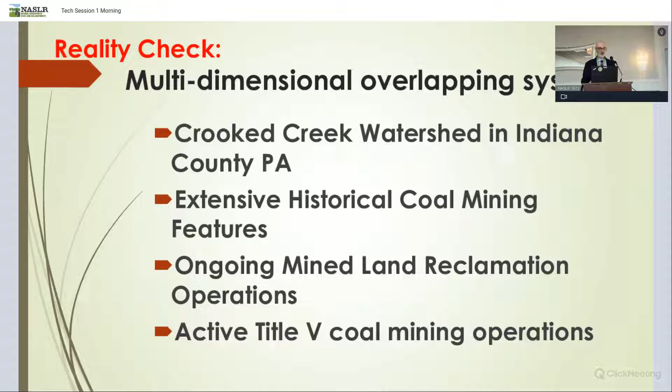And the Crooked Creek watershed in Indiana County, PA is no different at all. It's got extensive historical coal mining features. There's ongoing reclamation activities that have been going on for quite some time we'll talk about. And there's still Title V active coal mine extraction going on in the watershed to date. So it's not black and white, folks.

And when I say the word systems, overlapping systems, I'm a trained scientist. I think like this. That's just my default setting. When I use the word systems, I want to get us all on the same page. Systems in my lingo can be either closed or open. Closed systems are something that we've all been through in class and laboratory, where we control the conditions. We control the physical boundaries of our experiments. We control the temperature. We control the energy and the matter going into the system. And then we make measurements based on what we observe, right?

And we identify properties and thermodynamics and things that just happen, and we use those, but then we apply them to the real world, and they're open systems, guys, right? Where energy and matter can be exchanged with the physical surroundings through time. So physical input almost constantly changes, right? And then the physical boundaries of these systems change. Sometimes we add a property. Sometimes we add some airspace because something's been piled up. Sometimes we can subtract the volume that used to occupy an airspace and all the constituents thereof.

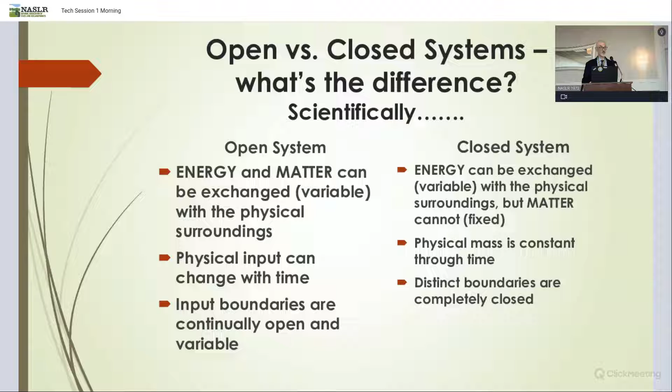So we're dealing with open systems here, and there's programmatic challenges of dealing with open systems, and it's a question of provenance and influence. And when I say that, I mean it matters where something happened and when it happened. And it matters to us as a group of professionals here this morning because it has everything to do with the funding eligibility and the funding streams through which we gain the means to deal with these problems. It matters when we identify the responsible entities, whether that's a financial liability or the professional entities that are going to take the fund stream and turn it into meaningful projects.

It also helps us define our scope of work, and we just have to consider the influence of what we do, because groundwater and surface water just doesn't hold still, right? It falls out of the sky, it piles up, gathers itself in, does what gravity does, and it moves through. So when it affects the periphery, it has everything to do with how we consider challenges, and it's really important that we tackle these problems with a cooperative nature. It's really crux to these things. So the mindset that our group at the BAMR has taken with a lot of the NGOs and partnering agencies is to design for versatility and partner with talent.

A phrase that I'll borrow from when I grew up is cast a wide net and get good help. And I think that that's largely represented in the room today and who's viewing this online. To characterize the open system dynamics that I've been talking about, just characterize it. A snapshot in time is one thing, but to characterize how the systems work and what's influencing through time and make those kind of interpretations and communicate clearly is really important.

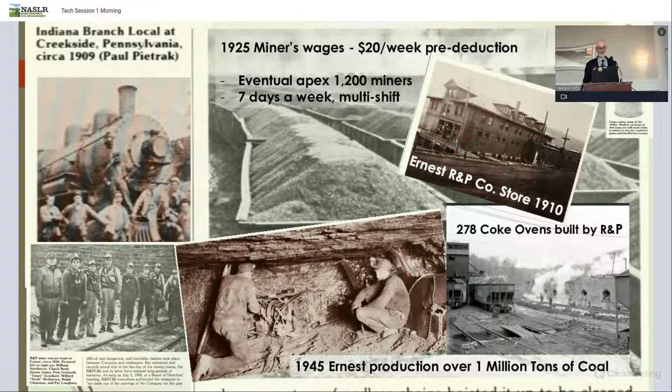I'm going to introduce you guys to some of the main suspects if we were building a dossier or a file about this watershed. The primary contaminant source area from the surface that we'd like to show you guys today is this Ernest refuse pile. It's that area I was pointing at. It was comprised of 94 acres of accumulated coal refuse from those mine complexes. Chemically speaking, it was high BTU and low sulfur, so it's valuable stuff. But the estimated volume of that pile was, give or take, 10 million cubic yards, okay? So think 94 acres at an average depth of about 100 feet. It was an unlined valley fill of stuff those guys didn't want to use because the stuff they brought out was not much better.

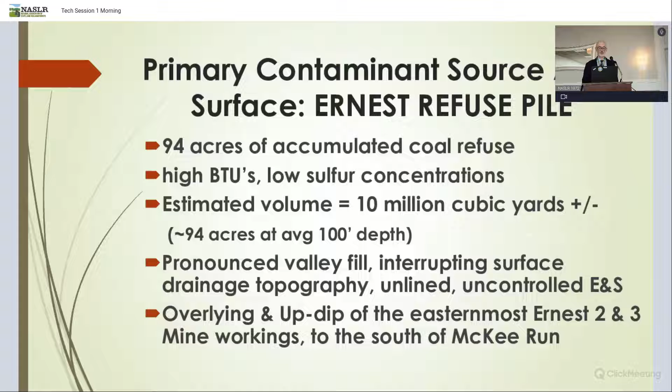But it interrupted the drainage topography. The E&S, the stormwater was an uncontrolled setting. It was just everything we don't want it to be from the reclamation perspective. It was overlying and up dip of the easternmost deep mine workings, which we know as the Ernest 2 and 3 mine workings, to the south of the receiving stream known as McKee Run.

Another primary contaminant source area in this watershed from the underground perspective, as I had mentioned, was the Ernest 2 and 3 mine pool. The mine pool area is comprised of over 2,400 acres of mine workings. Now, the entire complex that's connected to everything underground in this area is 21 square miles. So the hydrogeologically connected portion of that for the Crooked Creek watershed is only about 18% of that, comprised of over 2,400 acres. The drainage area for this particular area, though, is over 5,400 acres.

The mine pool volume is just this massive number. It's 1.5 billion gallons of water, or storage capacity in those mine workings. The total mine pool area above the discharge elevations that you saw on the map comprised 508 acres, okay, but 314 million gallons of storage capacity in the elevations above the discharges. What that means is we have hydrostatic pressure pushing that much water out at those discharge elevations. So there's 314 million gallons of storage capacity that's fluxing through.

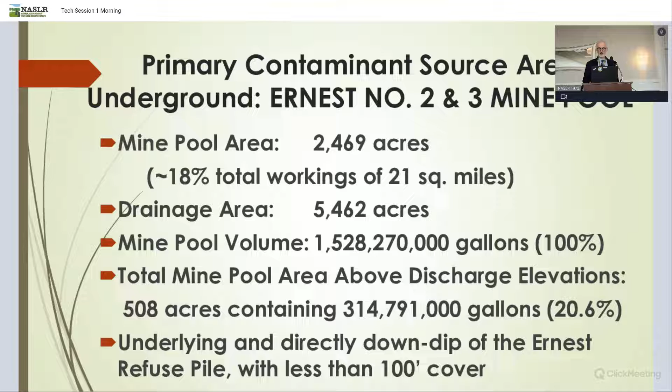Now to those point source discharges. The Ernest Mine Portal was the easternmost of those stars on the map, and it was an Upper Freeport Mine Complex drift entry, and it's currently free flowing. Okay, the estimated surface elevation is about 1050. It's up dip and at higher elevation than the other discharge I'll talk about in a moment. That's about 1.4 miles from that other discharge. Okay, but it flows at about 630 gallons a minute presently. It used to be more than that.

But we're talking about 330 plus million gallons per year, and it loads pollutants in the Crooked Creek watershed to the tune of 77,500 pounds per year of our normal mining constituents there, being the key run. Now, those last 2 points I'll kind of leave off. There's been a chemical shift in that loading rate, and there's been a flow shift at that point too, and I'll get into those details.

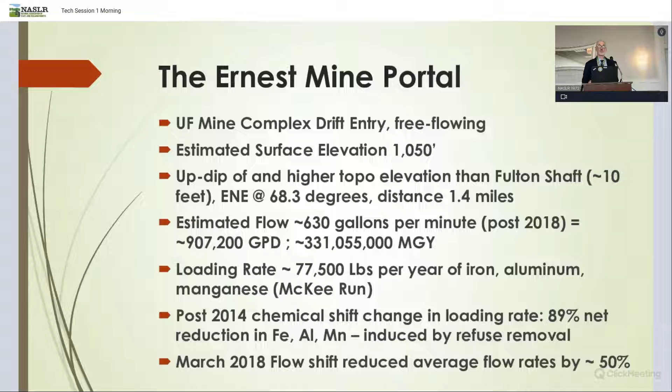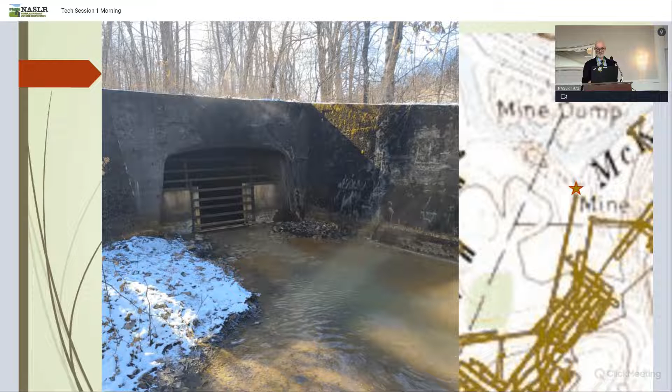It's kind of a teaser there, but there's a picture of the Ernest Mine Portal for you guys this morning. It's plain as day. What is that? It's a mine entry, and there's water pouring right out. There's a peek inside a little bit. You can really see far back into that.

Okay. The other point source discharge to the west is known as the Fulton Shaft. Same mining complex. It's a shaft structure, largely collapsed. It doesn't look like a shaft. I'll show you a picture in a minute. It's about 10 feet topographically lower than that other discharge point at the Ernest Portal. Okay. It's also down dip. Its estimated flow right now is about 1,150 gallons a minute, okay, or maybe 604 million gallons a year.

It loads pollutants into the stream as well to Fulton Run and Crooked Creek, okay, maybe 47,000 pounds per year. And it's also experienced some shifts in loading rate and flow, and I will get into that a little bit later. So if you want a teaser there, look real quick before too late.

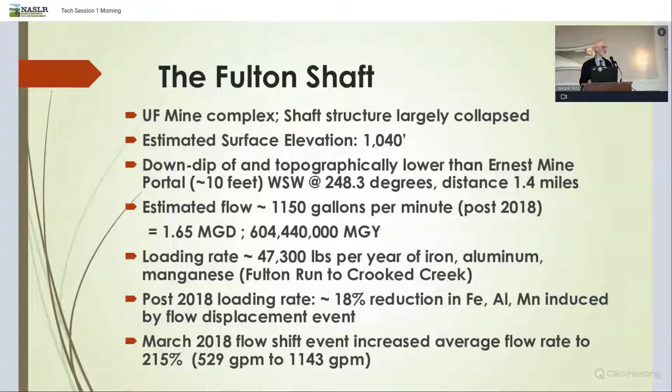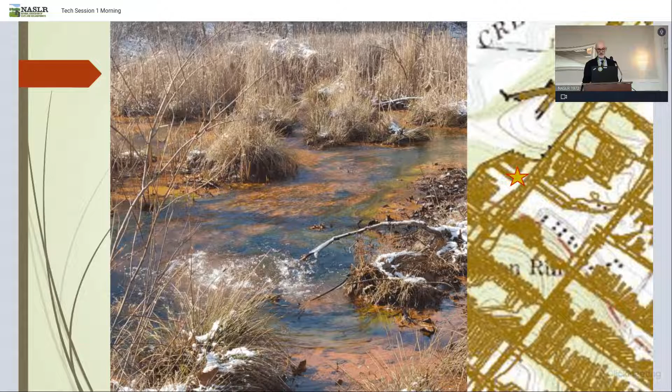Okay, here's a picture of the Fulton Shaft. It's an upwelling in a swamp. Okay, you drive up to it and it just looks like a wetland. But if you see the bottom of the picture there, that water is really boiling. It's really difficult to measure the flow. We've made some interpretations regarding that. It was measured one time when the flow was less and there were easier apparatus installation opportunities there. But you see a lot of iron deposition, things like that. Fulton Shaft chemistry, I threw this in here just real quick.

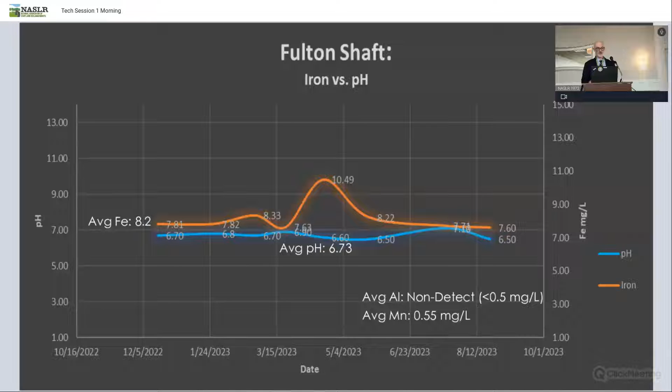It's not terrible looking. Okay, its average pH in the past year has been 6.7. The average iron concentration is only 8.2, so it's not that bad. That'll come into play in a little bit here. There's another picture of everything.

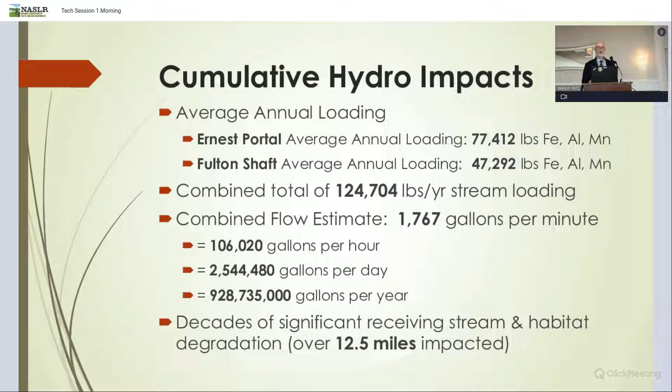The combined flow estimate from these things is about 1,800 gallons a minute, just shy of 1,800 gallons a minute, which translates to 928 million plus gallons per year coming out of that directly into the surface water. And it degrades significant receiving stream habitat for about 12.5 miles, and it has done so for some time.

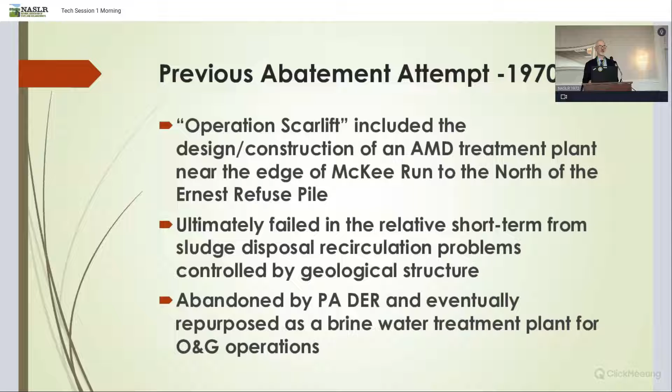Okay, so it was a great learning opportunity for us to understand a lot more about sludge recirculation and where to get rid of this stuff and just move forward positively from that. Okay, it's there today. You can drive right past it. It's currently a brine water treatment for some oil and gas operations.

Okay, with that, I'm going to hand things over to Todd Coleman from My Tech Engineers. He's been working with that coal refuse removal project that Robindale Energy Services has executed over a number of years, and he's going to tell you a little bit about it.

Yeah, thank you, Mike. With the construction of the multiple cogeneration plants around the Ebensburg area, Cambria Cogen, Ebensburg Power, the Colver plant that some of you toured with us yesterday, they were all built in the year of about 1988 to 1993. And with the construction of those plants began the scramble to acquire and permit long-term fuel supplies to feed those plants.

Air Products Corporation from Allentown built the Cambria Cogen plant at the Mine 33 site, which again, we toured there yesterday also. And in 1993, they entered into an agreement to buy the Lucerne and Ernest refuse piles from R&P. The Lucerne pile was located about 6 miles south of Indiana at the town of Homer City, and the Ernest pile was about 5 miles north of Indiana at the town of Ernest that Mike has showed you some of the history of.

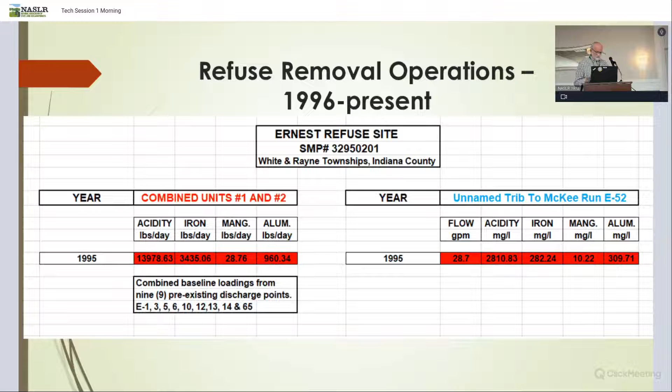The economic and business model from the operator was and had to be that when a truck left with fuel for the plant, it's bringing back a load of ash. Basically, the return volume is about 90% with what they add in limestone, water for hydration. There was over 10 million tons of refuse taken from the site. We were permitted to bring back a little over 9 million yards of alkaline ash.

So that being said, you couldn't start at the bottom end of the pile because the refuse is 130 feet deep. There's no way you could get enough refuse out of the way in the beginning to create enough area to immediately start placing ash. So consequently, you had to go to the south end of the pile where it was 40 feet thick, start trucking out, so you could immediately create airspace to begin ash placement. So that then brings the problem as you start to advance south to north. You now have the stream chasing you from behind.

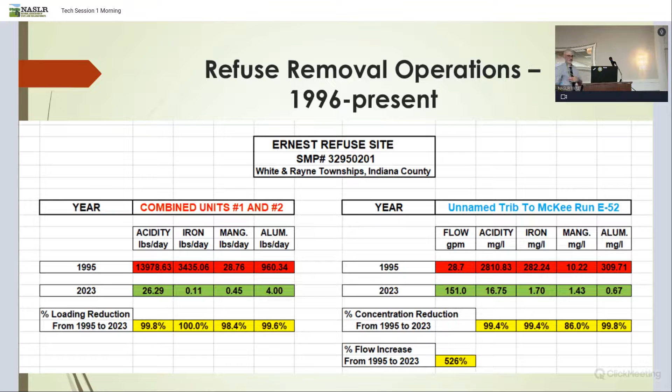Okay, folks, time is an issue. I know slow and steady wins the race, and the race has been won, but I have about 2 minutes maybe to close this one up. We've got a whole agenda in front of us. So Brandon and I are going to take you through what I call the micro machines narration now. Do you remember those old commercials with the micro machine guy that had to talk fast?

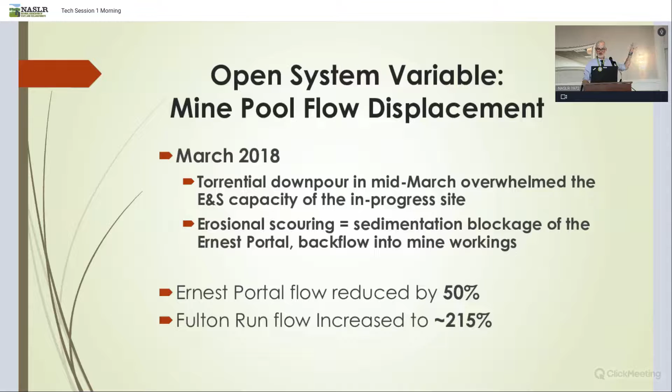That was really the game changer. That refuse removal was the game changer. What it did in our open system was it displaced the flow from one of those discharge locations to another. Really, the Ernest portal flow was reduced by 50%. That was displaced down to the Fulton Run, okay? Just note that the flow is displaced. See, there's a graph. This was the old flow. That's the new flow, 50% reduction, okay?

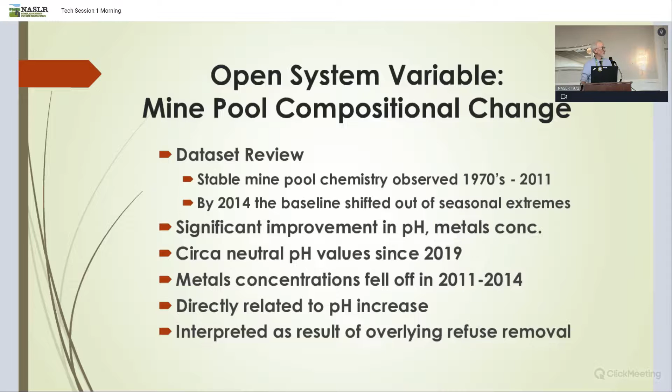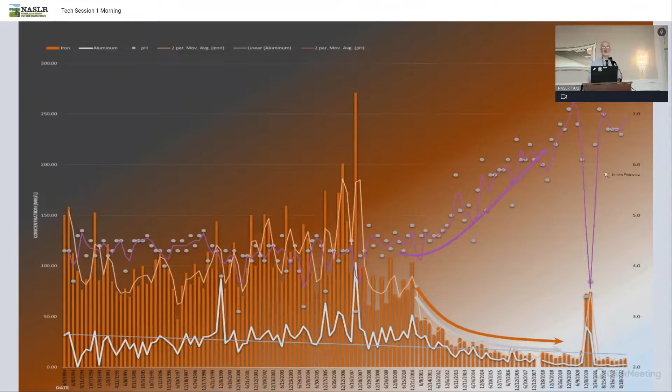The other open system variable that changed was the mine pool composition detected at the Ernest portal, okay? There's a lot of verbiage here. What you guys need to know is that the pH increased from the low 4s to about 7, okay? The metals decreased from a lot to not very much. This is the entire graph. That curve right there is the pH over time. These are the metals loading coming out of the Ernest portal. See how the metals just drop and pH goes up? That's interpreted to be the result of that refuse removal, okay?

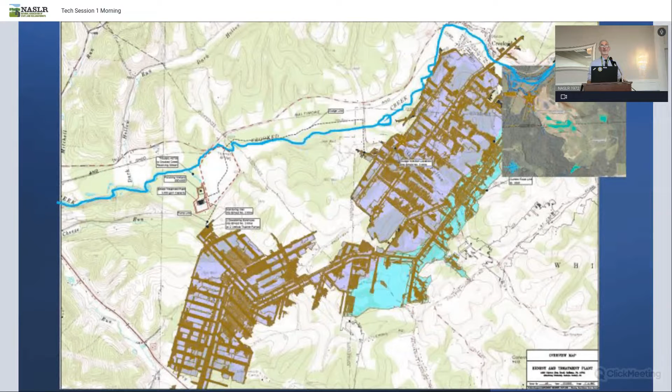So if I can speak for Brandon real quickly, the figure here shows all of the features that you see here and also the plans for a Title IV treatment plant, okay, that's going to attack the Ernest mine pool and eliminate these discharges. And because of that chemical shift, there's a cost savings multiplier of 2.9. That water is going to be almost 3 times cheaper to treat if and when this plant, which has currently been applied for and is pending through the bill funding, will be installed. There's a conceptual view of the plant. Happy to talk to you about that situation. And I'll turn it over.

You keep going. Keep going. Okay. I want to, Brandon, stand over here.

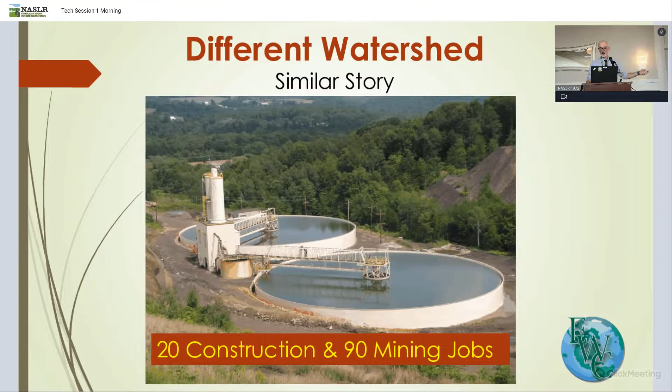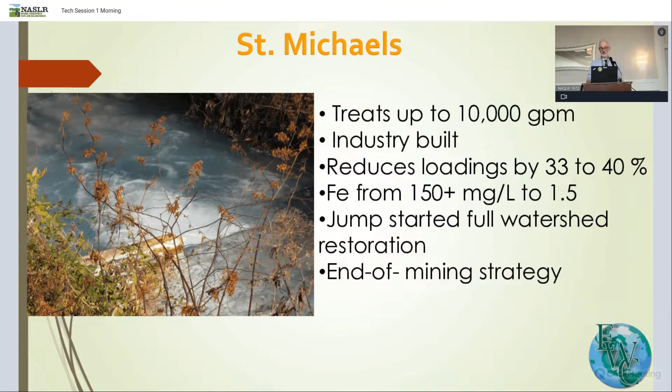Brandon was going to stand up here and he's provided me with these slides, because those of you in the audience, and there are many of you that know the story of the St. Michael's plant, we're following a parallel course for the St. Michael's plant. An active mining entity, Rosebud Mining Company, has donated the design for the plant that's going to be constructed in the Ernest watershed. Okay, and very similar to the St. Michael's situation, we're gonna operate that at almost 3 times cheaper than it would have otherwise been.

So we have Title IV loading features, Title V permits taking refuse out from yesteryear. We have a Title V entity in Rosebud Mining Company designing a treatment system that's applied for to treat Title IV water. When I say cooperative, that's capital C cooperative, right? And when we say managed watershed, this isn't just a watershed we can walk away from. It's one that we're going to have to maintain a presence in. We're going to have to maintain and operate that treatment system over time. So we can't just call it a restored watershed. We're calling it a managed watershed.

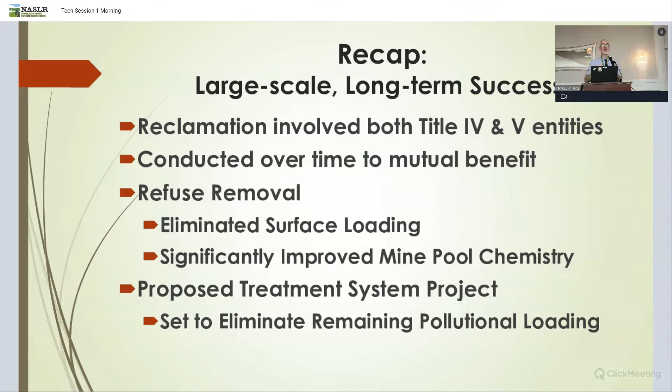Okay, but this is a huge success story. Everybody that lives here has always said it's hopeless. It's too big. It's too expensive. You can't get it done. It's always been there, and it will always be there. And that's just not the case in the Crooked Creek watershed because of this cooperative nature. We're problem solvers, but we can't do it alone. We have to do it together. We got to do it creatively, and we have to wait for processes to happen over time. So we have cast a wide net, and we have gotten good help over time. Great things have happened in the Ernest area in Crooked Creek Watershed.